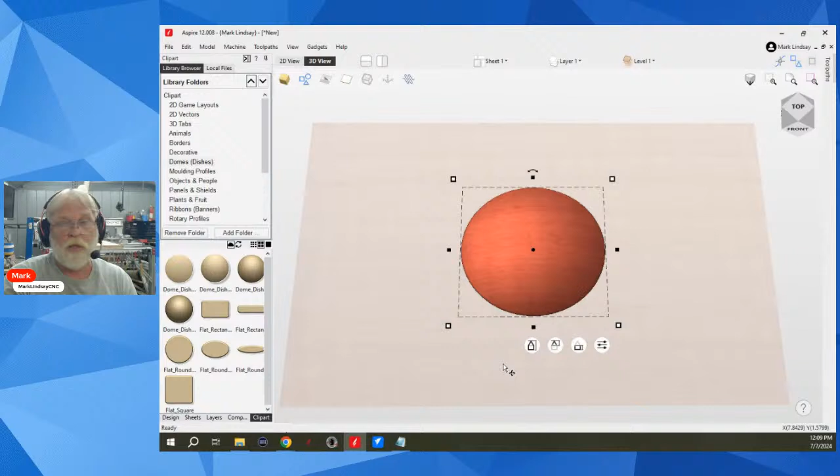So when we put components into our component tree, let's say we go over here to clip art and I jump in here and I grab easily the most common, a dome and dish. I'm going to go for a fairly shallow dome slash dish, and we'll just click and drag one over here to the center of our material. Now we have a component, and you can see it takes on that appearance. This is the modeling plane, and we've added our first component to that plane. This modeling plane is that foundation that we're going to start building up on, or subtracting from in the case of a dish.

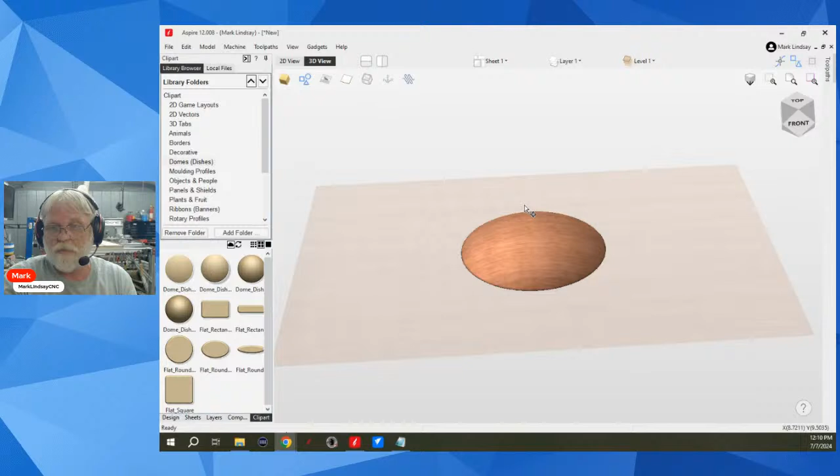Question: the modeling plane equates to the size of the material in setup. From Kurt over at Crafty Jans. Yes, the modeling plane equates to the size of the material. The software at this point doesn't know how big of a model we're going to create. So it's going to assume you're going to use the entire piece of material. Well, when you get your model completed, when you get it finished, it now knows where the modeling plane is. It now knows where your models are, but it doesn't quite yet know what you want to carve. We'll get into that later on. But as it sits, yes, the modeling plane is equal to the size of the material that you have.

Now, Ellen says, my view of how I'm sitting, the dome looks like a big hole from here. Yes, and that can be an optical illusion, but you can see that it is a dome.

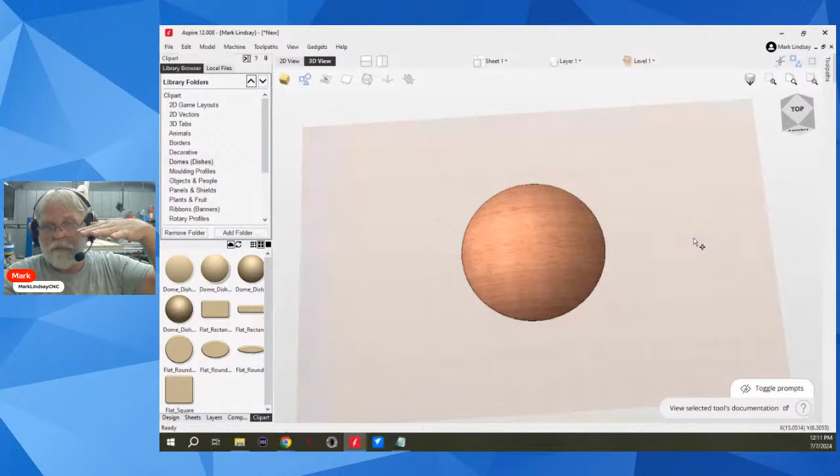Any models that we put out here now are going to be added to the top of that modeling plane. Because again, it's like the tabletop that you're building your building block pyramid on top of. That's all it is. That's all a modeling plane is: it's a surface to build up from. It doesn't have any thickness. It doesn't have any height. It's just something there to allow you to visualize what the model is going to look like after it's completed. And it's a reference for the software to know where these models are starting from.

Now, remember that the software creates the model. It models from the bottom up. So just like when you're stacking blocks one on top of the other, it's going to take that bottom block and anything you add after that is going to go on top. You can't put it off to the side. It's going to go up.

Now you can put something else off to the side of your modeling plane, but it's going to be within that first level. Let's put this out here too. I'll double click to put one in the center of my material, and now we're going to put it over here. So I have two objects on the modeling plane beside each other, but they're still sitting on that basic tabletop.

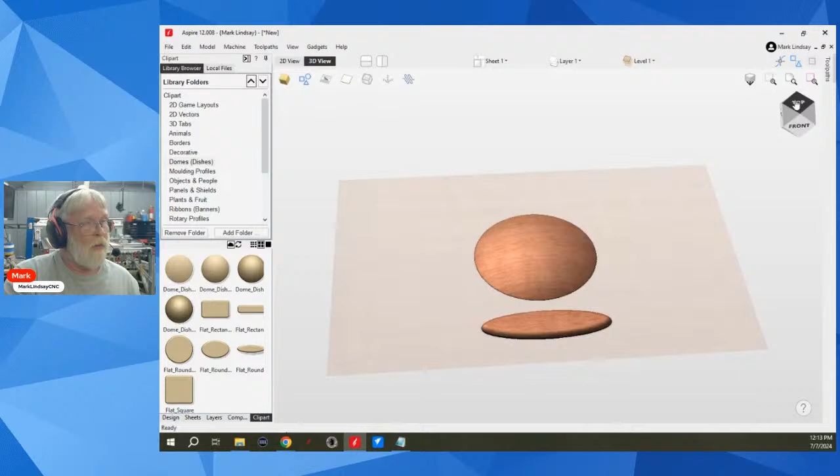So we'll go back up to a straight top view here and look at our components. We now have two components. This was the first one added, and this was the second one added. It starts from the bottom up. Now these two don't interact with one another, so that's fine.

But now let's get into the first discussion of the zero plane. And that is, when do you use one? No, let's back up from that. Let's back up to what a zero plane actually is.

Back over here in the design tab, I'm going to jump over to my 2D view. So I've got my two components placed out here. Everything is fine. What a zero plane is, it is an additional 3D component that has no height and no thickness. So in that regard, it is similar to the modeling plane, but that's where that similarity ends - it's another plane that has no height and no thickness to it.

The other main difference between a zero plane and a modeling plane is you can add height and thickness to a zero plane.

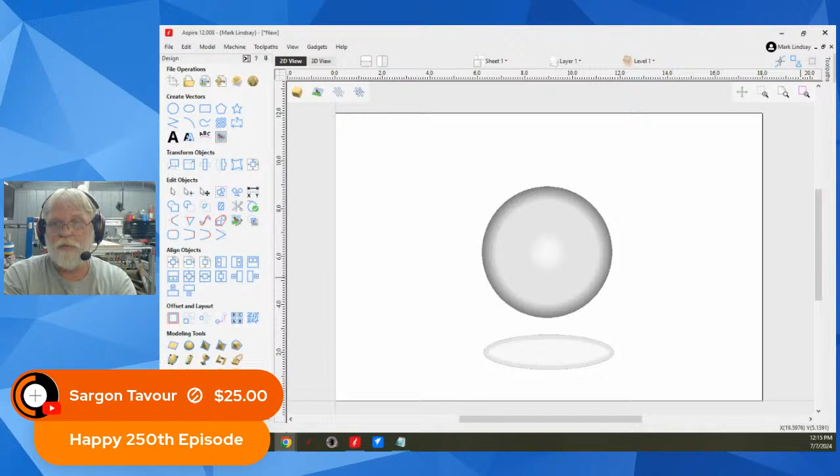A zero plane can also be manipulated in that you can tilt a zero plane or fade a zero plane, which you cannot do with the modeling plane. Again, the modeling plane is the flat surface that you're building up your components on.

So for a zero plane over here in Aspire, you have to hold down Shift and click this first icon, which is creating a flat shape component. Hold down Shift and it'll create a zero plane.

Now, why would you want a zero plane? Why are zero planes used? How are zero planes used? When we're talking about the context of a design software, zero planes are most commonly used, but not always, when whatever you're carving is placed into a dish.

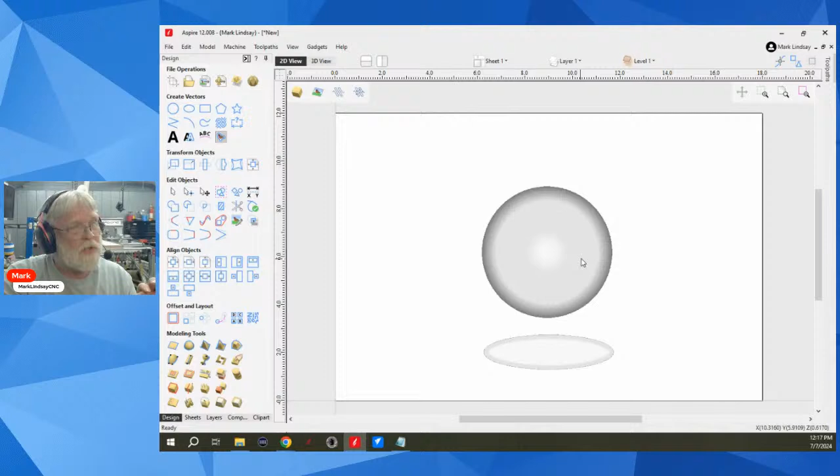The reason for that is, if we come back over here to my 3D view, I'm going to select this component here, my dome. I'm going to go into the component tree, make sure I have that dish highlighted, right click and go into the properties. Now we can see here in the properties, we have a shape height, base height of 0, and we have a combine mode. The combine mode for this dome right now is set to merge, meaning that anything beneath it, it's going to merge with that component.

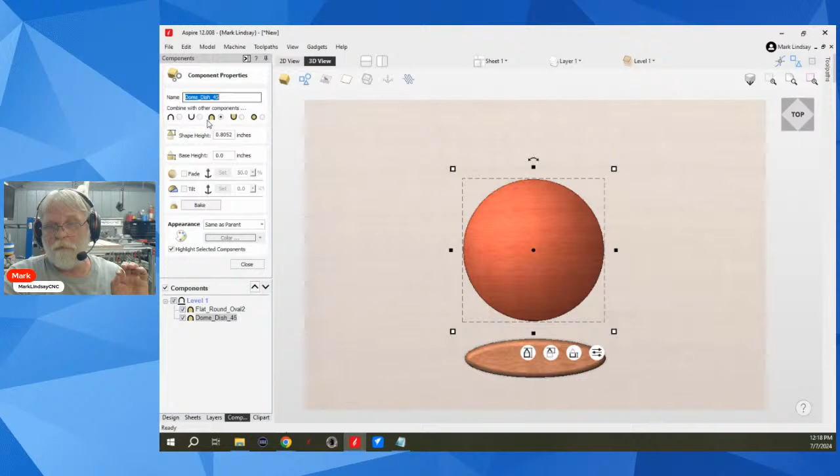Well, there are no components beneath it. But if you look at this, it looks like an upside down letter U. We're going to change that to subtract. And now what it's done is it's formed a dish instead of a dome.

We still have the combine mode set to subtract here, but now this is a dish. Now, where does the zero plane come into this? And why would you use it on a dish?

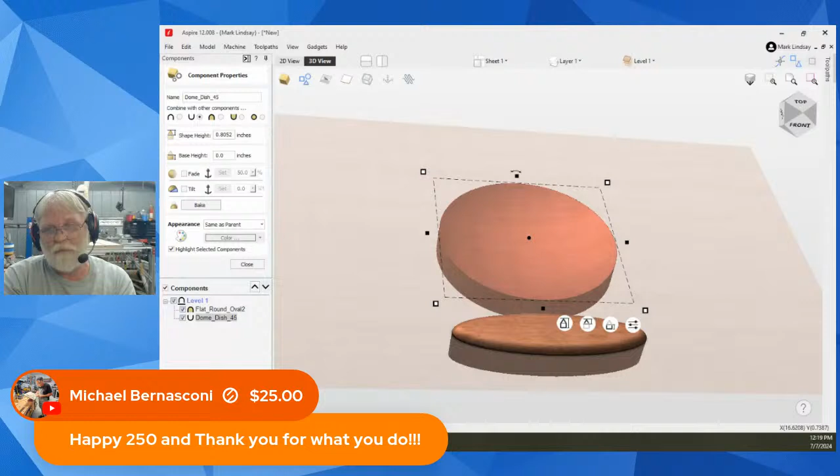Let's see. Why would you use it in making a dish? Well, because if we look over here at our dish, we can see this ragged edge right here. And that's caused by the pixels used in the bitmap that creates this dish.

Now let me show you what I'm talking about. We come over here to the 2D view, and we see that this is basically a depth map, a grayscale bitmap image. Let me rephrase that - although it is in grayscale, it's not truly a grayscale image.

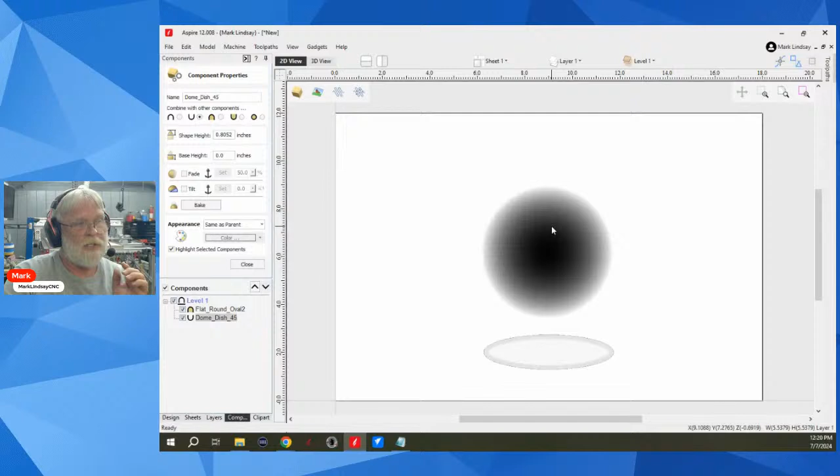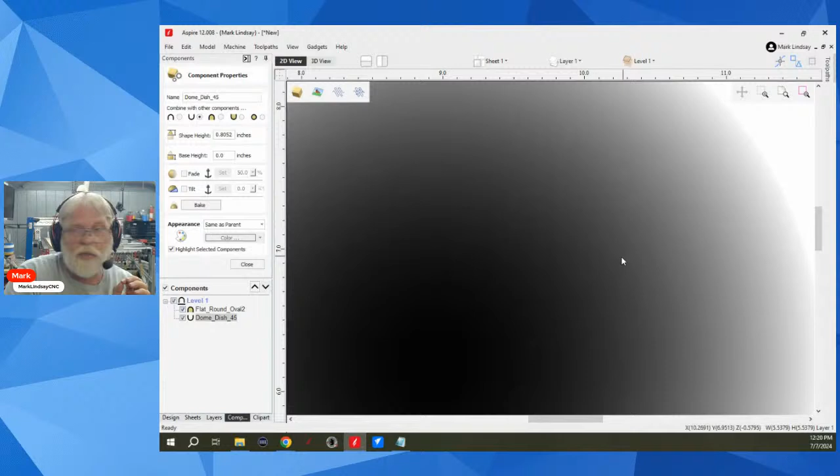In other words, what I'm getting at is, while you can take a grayscale image and import it into Aspire and make a 3D component from that grayscale image, it's not the same as a depth map. The depth map, you'll notice these shades of gray, and for those of you keeping score, there are 256 of them. These shades of gray, you can't really see a gradient. You can't see a dividing line between this lighter color and this darker color, or this darker color and this one, like you would if you created a gradient in an imaging program.

But if you look out here at the edge, you can start to see the pixels that make up this bitmap image. It's these pixels where it goes from this very light gray to bright white that form these jagged edges. And that's as close as I can get to it. It's those pixels that create that jagged edge, okay?

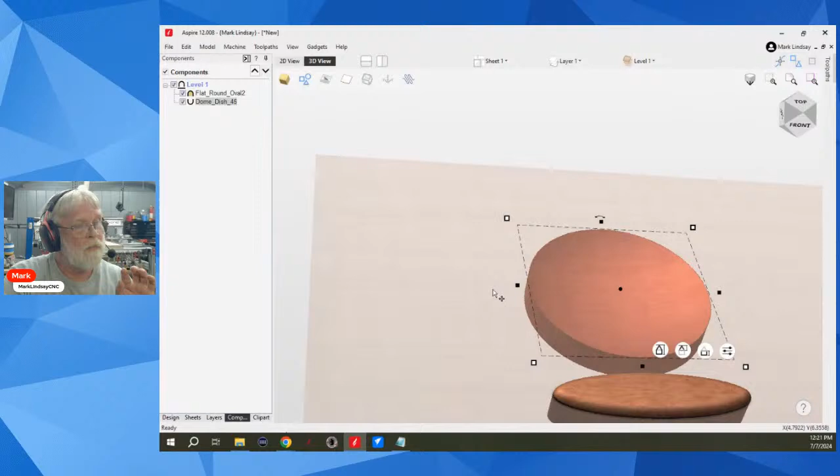So where a zero plane comes into play, remember, a zero plane is a 3D component that has no height or no thickness. A zero plane is added, let me close this, to cap off the top surface of our 3D model. Remember, all of our components gathered together in total make up the 3D model.

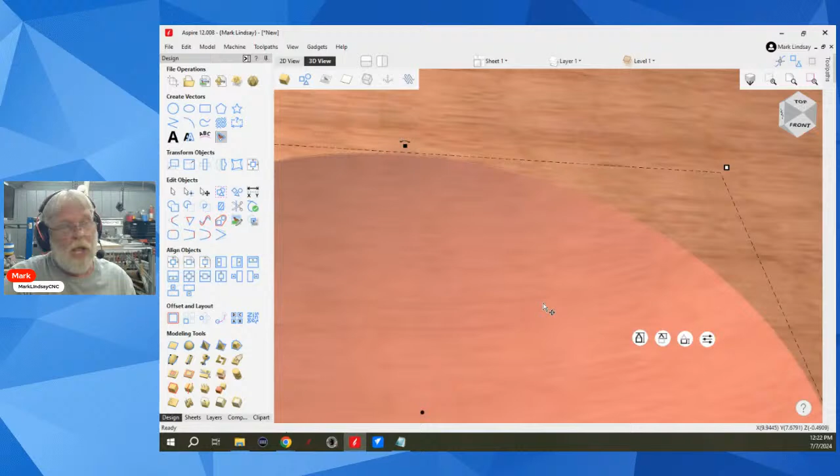So adding a zero plane to the top of it, let me get one created here, hold down shift and click on that button, and we've now added a zero plane. We've added a 3D component with no height, with no thickness, and it's set to combine with this component. And when it combines this component and this component, you can see how that zero plane fills in those jagged edges. It's simply the way it combines with this dish to fill in these jagged edges so that the bit doesn't attempt to carve those jagged edges.

This is the main purpose of a zero plane. It's not the only purpose, but this is the most common use you're ever going to find of a zero plane. Now, I mentioned earlier that you can modify a zero plane. You can, if I come over here to my component tree, there's my zero plane right there.

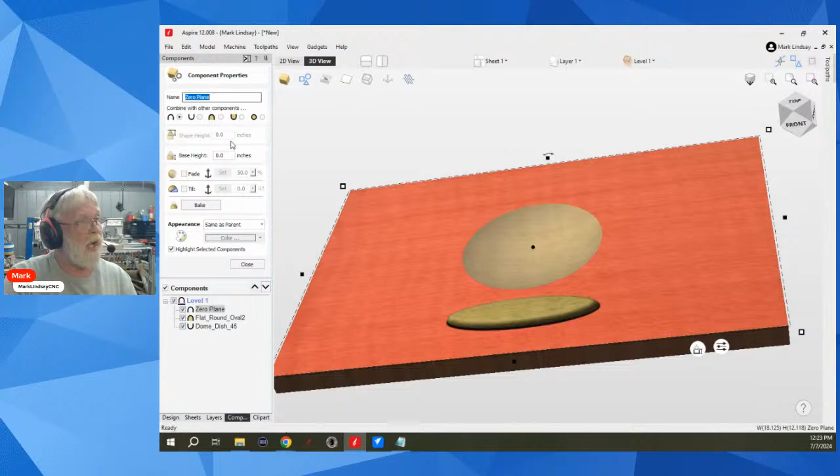I can select it, right click, come down to properties, and I can give that zero plane a base height. I can't give it a shape height because the shape height is 0. But I can give it a base height, which will add thickness below the zero plane. So if I give a base height of, let's go with a quarter inch.

And it updates, I have now moved that zero plane up, but now my dish has disappeared. It has filled in that dish. So I can't do that because it's going to fill in that dish.

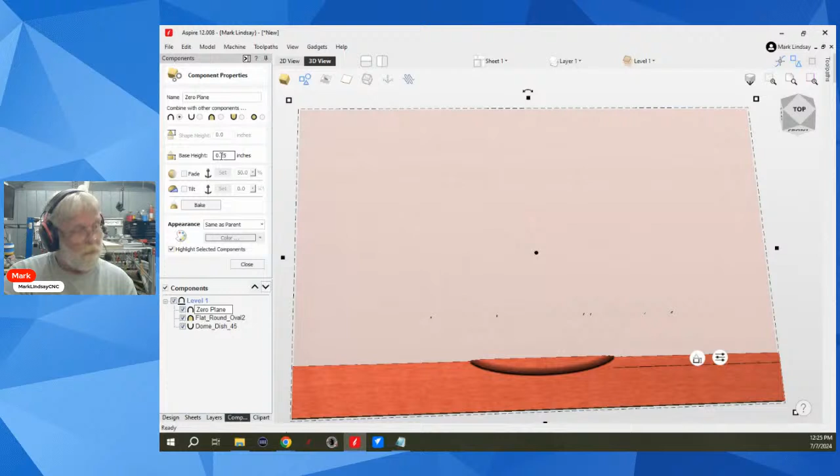But I can come here and give it a negative height, a negative base height. But again, come on, it's taking a while for the software to catch up. Come on, yep, there we go. Come on, let's go with negative. This poor computer, it's trying to, there we go.

By dropping that zero plane down, it's going to cut into the dish. There we go, making our dish shallower than it needs to be, than we want it to be.

So we can adjust it, it will come in handy on occasion, but I'm going to take it back to 0 the way it's supposed to be. And now it's not interfering with our components. Click off, close my properties.

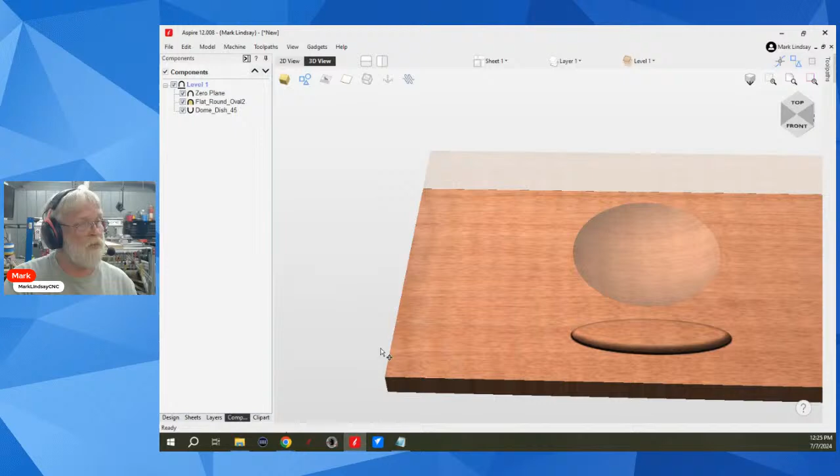So a zero plane is most commonly used, and its main purpose is to act as another component that will interact with everything beneath it and fill in any missing pixels caused by the pixelization of our dish.

Now, I'm mentioning dishes quite often, but without getting too technical, again, that's the main use of a zero plane. Now, there are other uses for a zero plane, but those come with more advanced 3D modeling that is way above my head. Michael Mazalik would be the better source for that.

A.L. Peleg says, so it makes the height of everything above it to be 0. No, it doesn't change the height of any component above it.

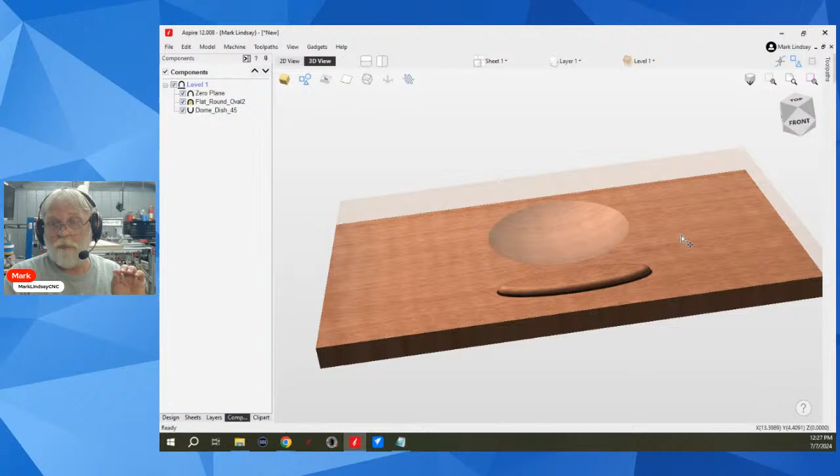Let's go back over here to the 3D view, and you can see that because I have my zero plane right here, this oval is still projecting above that zero plane. See that?

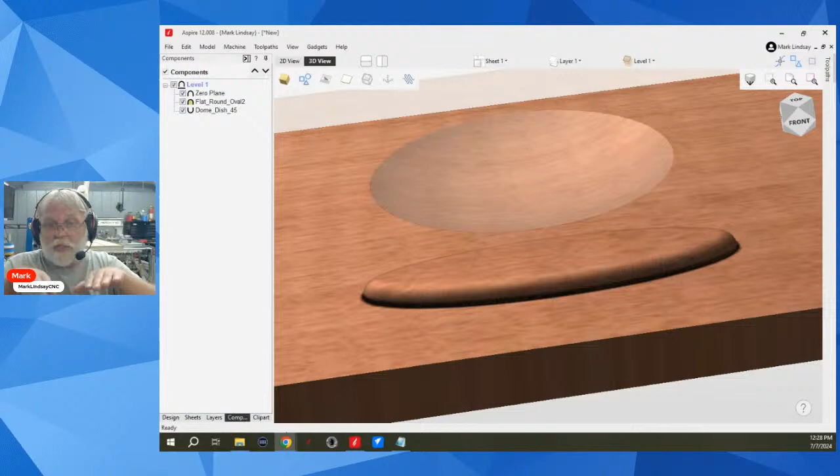If you would take any other model and place a zero plane into it, it will cut above it, yes it will. The zero plane is acting like in our tower of blocks, it's acting as another sheet between some blocks. So we can build up blocks and then lay that solid sheet over the top and then continue to build on top of it. And that solid sheet basically helps to fill in the cracks between the blocks.

So will the second component get 90-degree sides from the minus number?

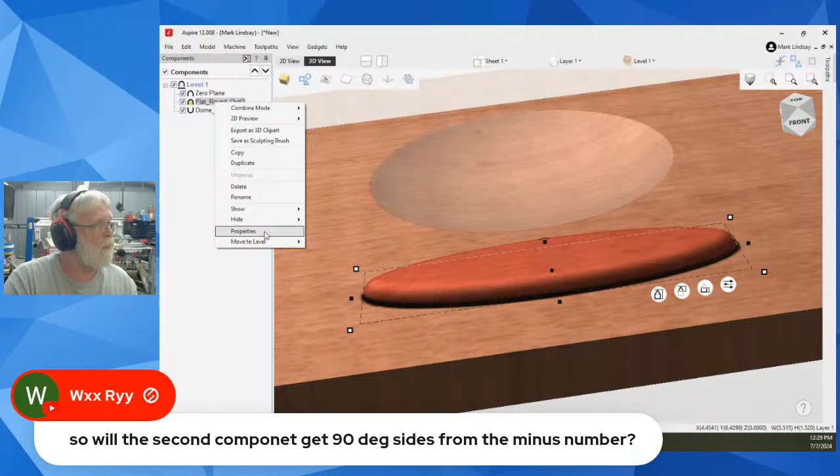This second component here is basically going to be carved down to the level of this zero plane. Depending upon how you set your tool path to carve, let's take a look at this flat round oval and see its properties. Its shape height is 1/4 inch tall. If I go to 1/2 inch tall, it's still going to be 1/2 inch above this plane.

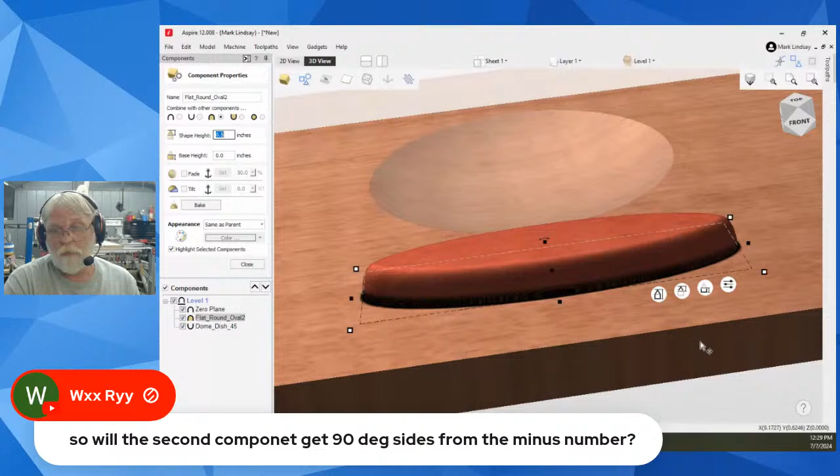Now look at my readouts down here in this corner when they appear. I'm up here at the surface, and that surface is zero. If I put this up here on top of this, it's 1/2 inch. There may be more base down below it, but it's going to count from here. As Michael Mazalik says, a zero plane equals a limiting plane. This is as deep as it's going to cut, except over here. Anything with a higher Z than this will be cut above it. Anything with a lower shape height is going to be cut into it.

So if I understand you, on multiple zero planes, you can only have one per level in the component tree.

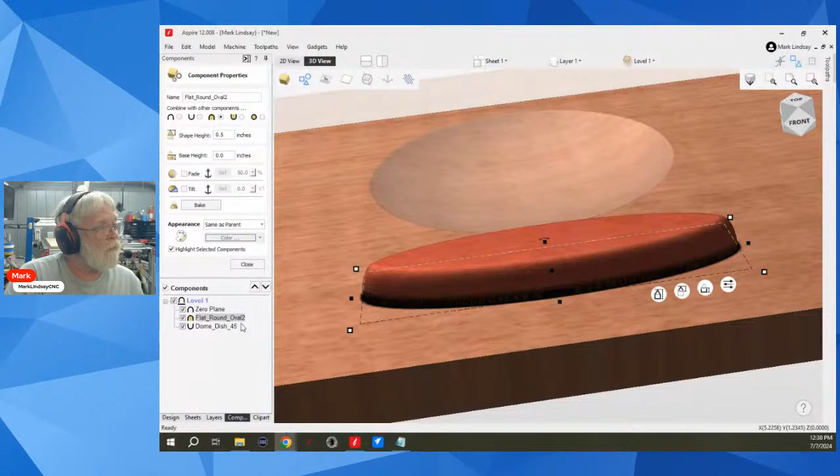I haven't tried multiple zero planes, but let's give it a shot. We'll go up here and insert a new level. In this level, come over, make sure I'm working in level 2. Let's see if I can add a zero plane in level 2. And it appears that I can add a zero plane on a separate level.

Now let me come back down to level 1 and see if I can add a second zero plane. I don't think you can, and to be honest, I'm not sure of an application where you'd need more than one zero plane on one level. But because it is confusing, you would have to rename each plane. So let's go ahead and try, and looking in my component tree, it did allow me to make more than one zero plane on that level. But you would probably want to rename these, generally speaking, for their purpose.

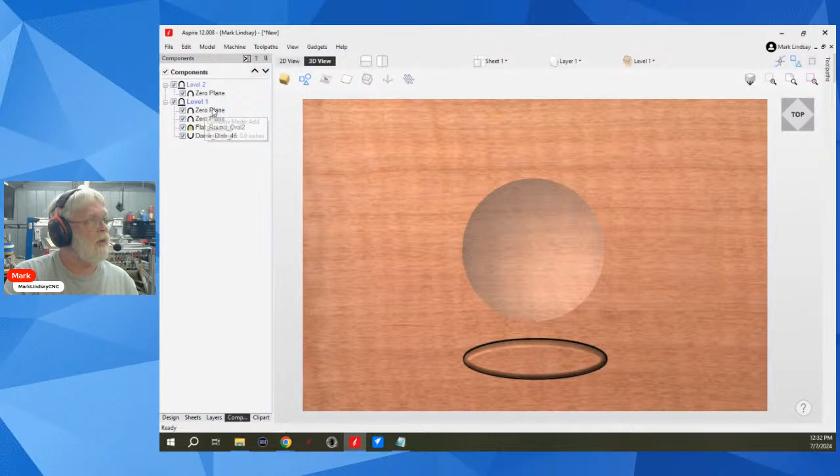So let me go ahead and get rid of this one, and I'll delete that one too, because I have no use for it for this discussion. And we'll delete the level as well. Boom. Okay, remember this is in the design context. We'll let this reload. Looking at the bottom, we're still good, nothing going through.

I'm also going to get rid of this oval simply because it's a distraction to me. There we go. This poor computer's having a hard time keeping up. Let me get back over here into my regular selection. This zero plane should come out here to the extents of my material, but all the playing with zero planes has done this.

Now we come over here to the 2D view. We've got the model for our dish, but if I come up here to layers, there is a layer for the zero plane. So the zero plane is created on its own layer, not its own level, its own layer. But by default, it's turned off to avoid confusion. Now if I turn that zero plane on, there it is. That's what happened, I moved the zero plane.

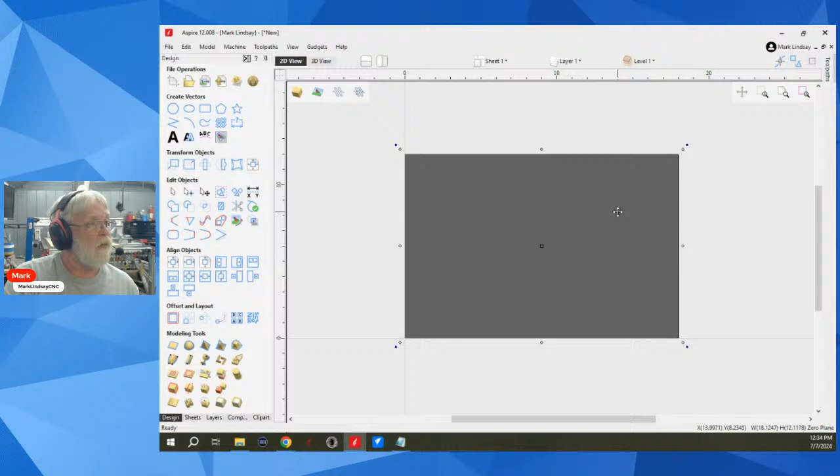So let's move that back up there so that it's covering the middle of the material. But you see what can happen is you can turn that zero plane on and change its shape, or change its size rather. But now you have this zero plane there and it becomes a distraction. So by default, the zero plane is turned off so that you can still see it, but do know that it makes its own layer.

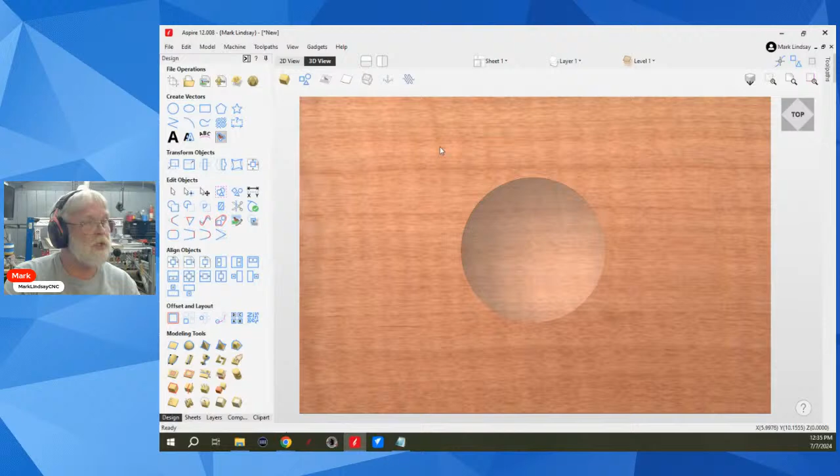Now once again, in the 3D view, we have it covering the whole sheet of material. This seems pretty simple, but it creates a bit of confusion. The main purpose of a zero plane is to fill in any rough edges on a dish. That's the main use. You can add a zero plane without using a dish, and in that case, as Michael pointed out, it's a limit plane. It's going to limit the depth of the carve to this surface right here, meaning the bit won't carve any deeper than this.

Let me go back over here, and I think what I'll do is start a new sheet. Yes, I'll do that. I'll add a new sheet with exactly the same settings, I'm not going to change anything. I'm going to call it sheet 2, and change over to sheet 2. All right, and I'm going to get into something else here. There's another context for a zero plane, and that is when you're importing a 3D model.

Russell says it's limit planes he can't figure out. Carving a 3D two-sided model, you need limit planes for both sides, but not always at the same level. Yes, that's when limit planes can be used.

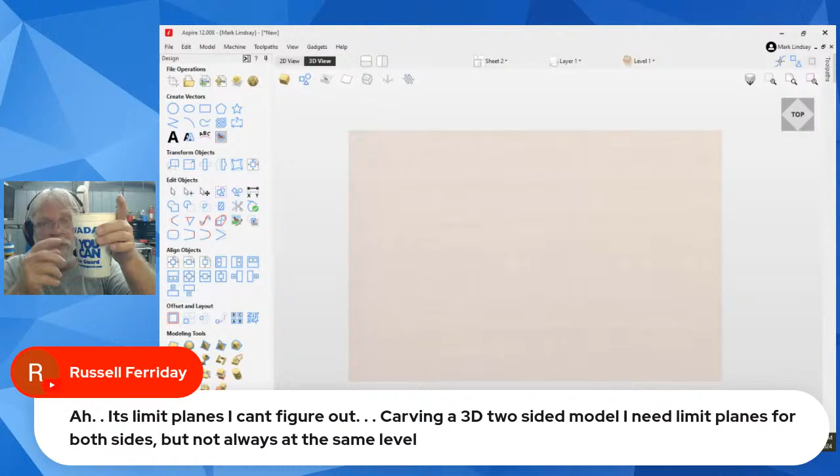For instance, if you have a model you're cutting about halfway through the material on the top, then when you flip it over, you want to cut just beyond the halfway point for the other side. You can set a limit plane and bring it down below halfway, so when it cuts through the object it'll cut about halfway. Then when you flip it over, it would cut beyond that halfway point so you don't have that line around your object that you'd have to sand off.

So yes, that's a perfect example. Now let me get back over here to sheet 1 because there was another question.

Ellen asks, do you have to bake everything? LOL, a make and bake. Yes, I will show when to use the zero plane, and in fact I already am. If you're creating a dish, use a zero plane - you will have a much better result with that.

Now if we come over here to the component tree and go into, let's say, the zero plane, we go into properties, there's an option to bake. Now what baking does - let me close this. This may or may not be a good example.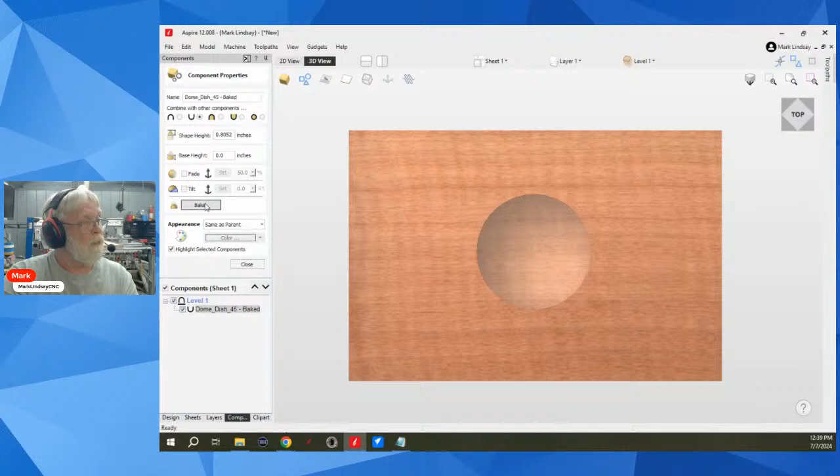Now when we come over here and close this, we come over to our component tree - we have a dome dish baked. We can look at it. Uh-oh, what happened? It's no longer a dish, it's now a dome. Can I control Z that? Yes, I can control Z that.

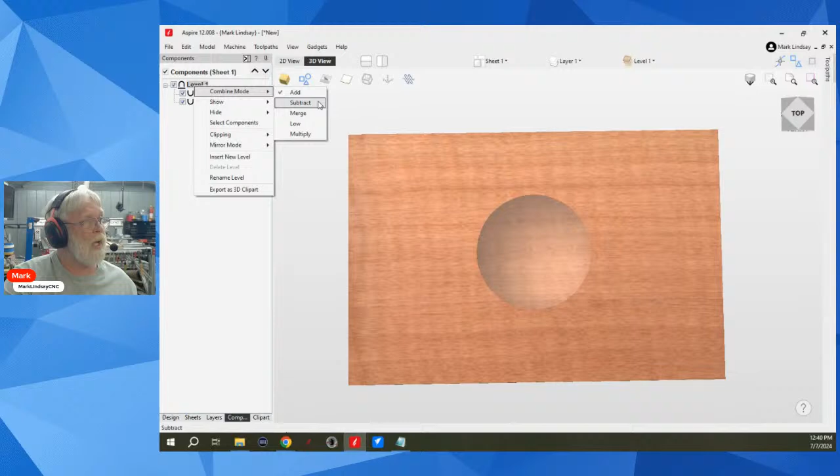What we have is we've got varying different combine modes. Let's take the combine mode and change that to subtract - what does that do? Nothing outwardly. Let's select the level, let's check the combine mode, and let's make that subtract. There's your problem - take that back to add. There we go.

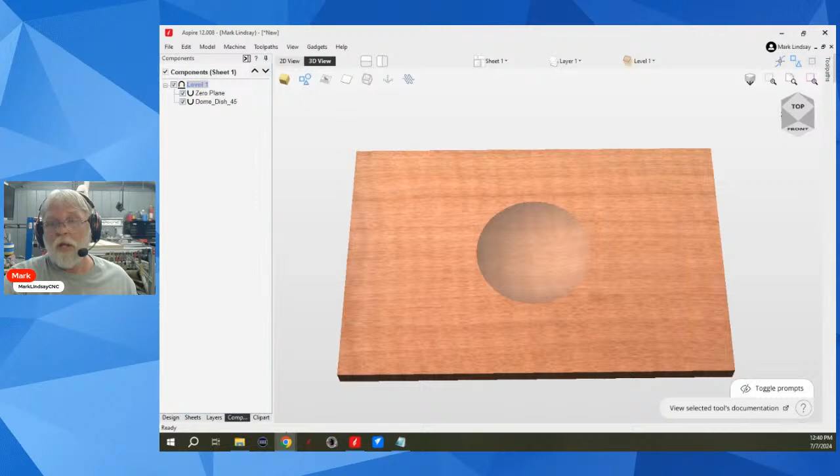Jim Brown says, so if you have 3 layers of 3 different woods, how would you use the zero plane? I wouldn't. You can - I guess you could set them. I see where you're going with this. I would have to explore it a little bit, Jim.

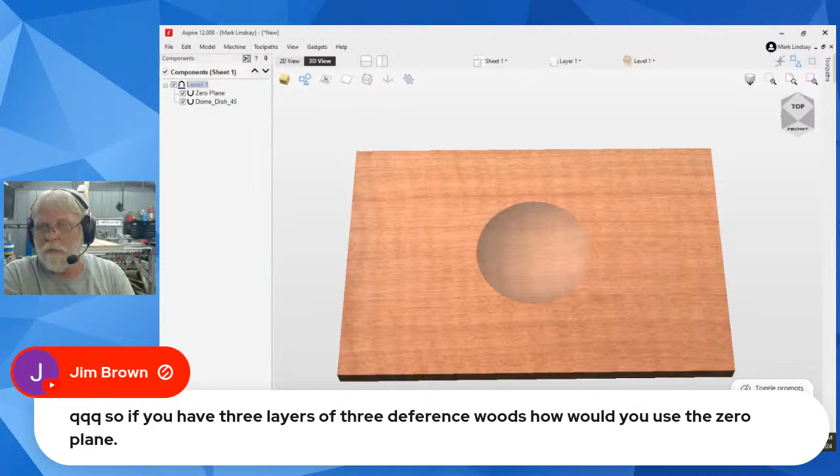You can use them to represent where, if you're gluing, say maple, then cherry, then maple again, and you want to carve something in that maple but not all the way through the cherry, you could set zero planes to limit you to this part of the model, cut down the thickness of your maple, then a zero plane here for the next part. But I would have to explore that - I've not explored that at all. Try it yourself, and when you create those zero planes, name one maple, then cherry, then walnut, or maple 2, whatever. Let me explore that because that's pretty cool - that's actually a pretty cool idea.

By baking these two, now that I have the combine modes set correctly, I can go into properties and bake them, and they should come out correct. Nope, it still wants to become positive instead of a negative. So you see, Ellen, you don't want to bake. Control Z to undo that - bring me back to my point here.

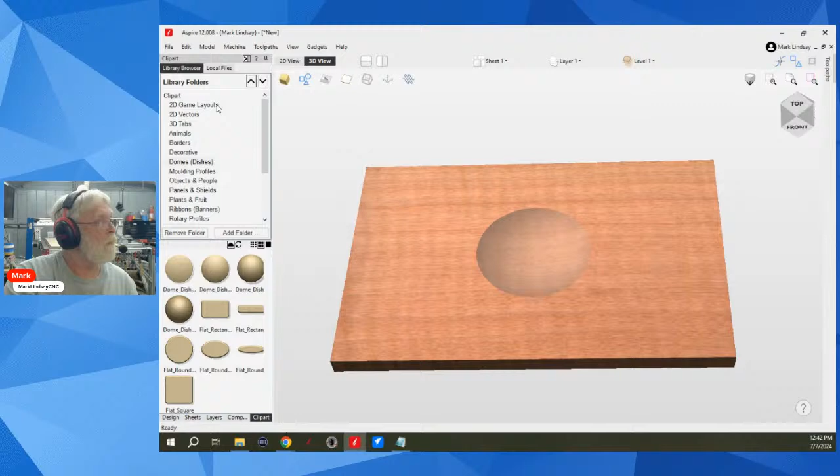Now where baking comes into effect is if you have, let's say, let's get into some clip art here, and we're going to take our representative mascot, Wally Gator, and put him down in the bottom of this dish. Hold down Shift and let's reduce his size. There's Wally. Okay, all right, now we've got the gator down in the bottom of the dish.

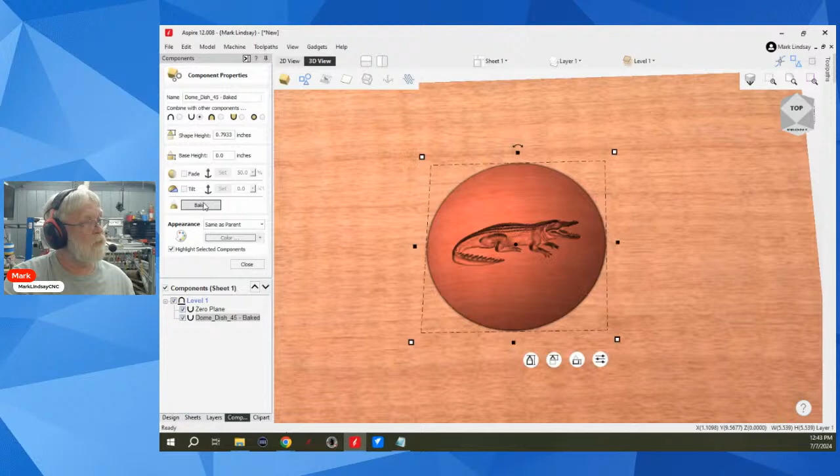Let me go into my component tree. I would probably want to move my alligator down below the zero plane. But if I take these two and bake them, and now - come on, ah, it flipped the opposite direction. What am I doing wrong, Michael? I'm doing something wrong here.

That is set to subtract - why would I do that? For some reason now changing the combine mode to the baked one. Okay, I get it, all right. Changing that combine mode, now you notice I no longer have the alligator and the dish.

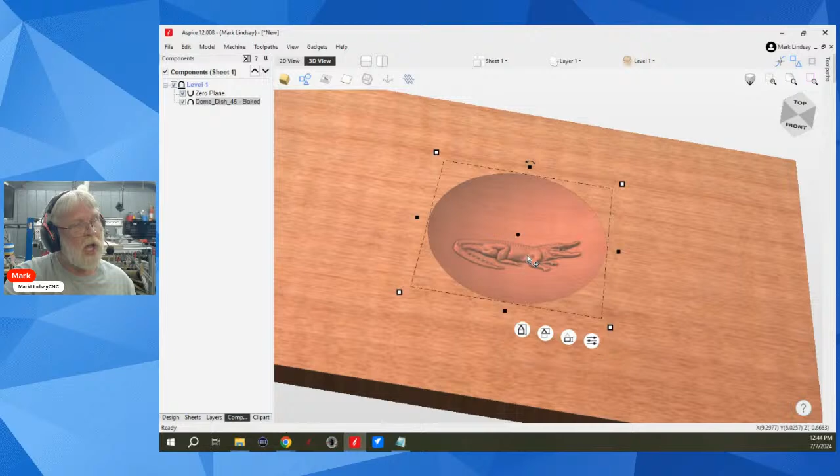And now they are one piece. I can no longer change the size of the gator, and I would have to Control Z to unbake them, or start over. You don't have to bake. You can, and in fact, Michael Mazalik taught me this quite a bit.

Either baking or, let me Control Z that to undo it so that I have my alligator and my dish back. All right, there's my alligator and my dish.

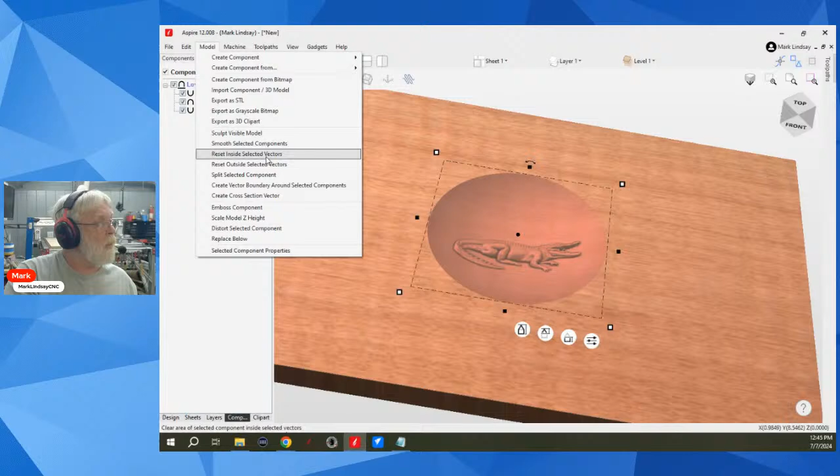What he has taught me is select these two, then it's up here under Model, I believe it's Create Component from Visible Model. To create a component from these two. It doesn't replace these two.

What it does is it creates a component. I need to hide the zero plane. There you go, shut off the zero plane. Now with those two selected, Model, Create Component from, or I can bake these components, or I can create components from visible model.

And now it adds another model. It doesn't replace these two, and in fact I need to turn them off. So now I have one piece. This is all one piece, it's no longer two, and that's this up here.

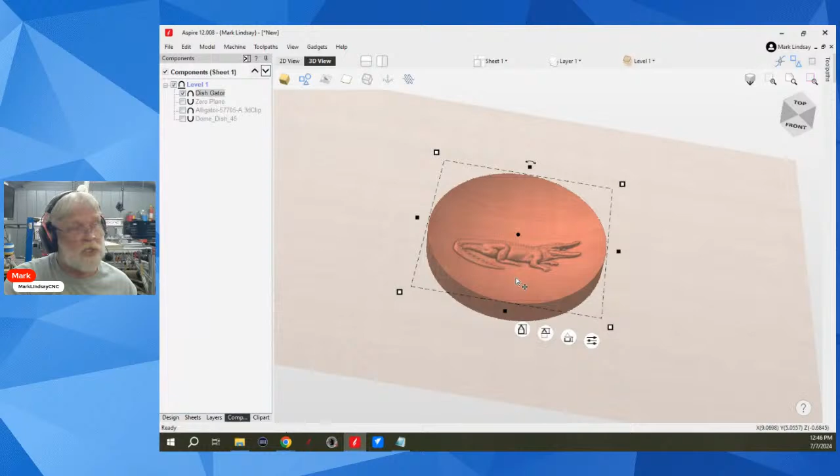So I could rename it, call it dish gator. But if I find a problem, if I need to change something, I can turn this off, turn these two back on, make my changes, then come back and make a new dish gator. So you can bake the model, but you don't have to, it's not a necessary step.

Okay, so let me go ahead and get rid of dish gator and turn my zero plane back on. I think I have to turn on dish gator. Yes I do, grab it and delete it. Shaboom, okay. So, all right, let me get back up here. I'm missing some questions, I'm sorry.

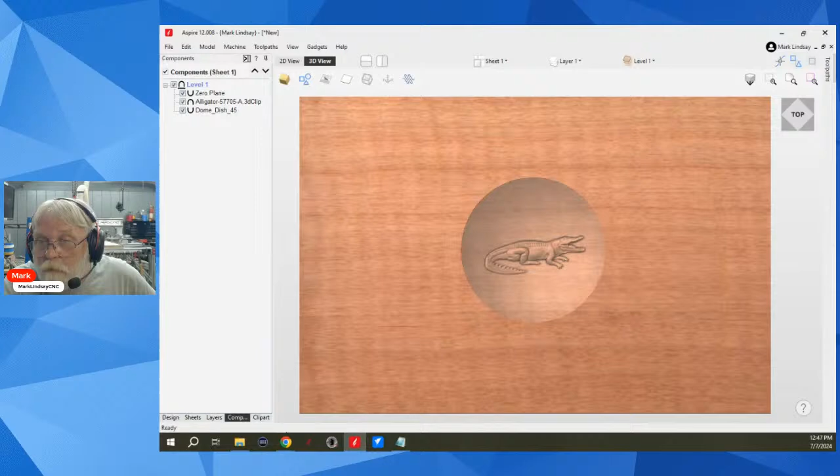Yes, that's what Michael just explained to me here. Could it have been, after baking, your baked stuff are negative, and the fact that the combine mode is subtract is what makes it to be a dome again? Yes, minus negative, yes, which sounds counterintuitive. A negative plus a negative does not necessarily equal a positive, but that's in essence what happened.

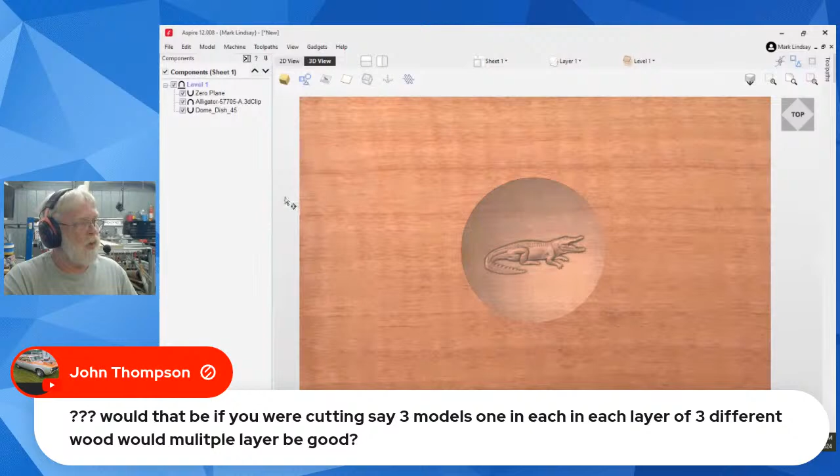John Thompson wants to know, would that be if you were cutting, say, 3 models, one in each layer of 3 different woods? Would the multiple layers be good? I think you mean multiple zero planes. So if I wanted this to, cutting this to start at the material surface...

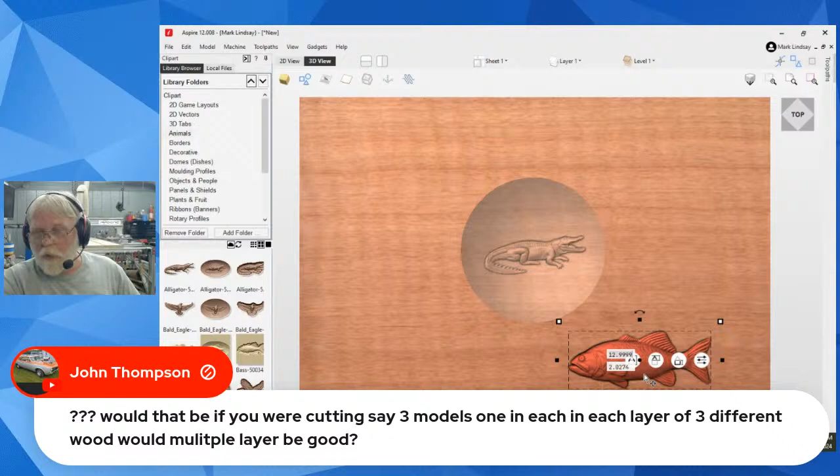Let's go back over here to clip art. I don't know, I'm just picking things out of thin air here. I wanted this cut way down deeper. Yes, I could create another zero plane here and drop that zero plane way down so that this fish, instead of being added to the top of this model, it was added, say, down here somewhere.

So yes, I could do that, John. Now let me Control Z because I don't want that fish there, and I don't want it there either. Shaboom. Oops, Control Y. Yep, I'm going to have to just go into the component tree and get rid of the fish. Delete, thank you.

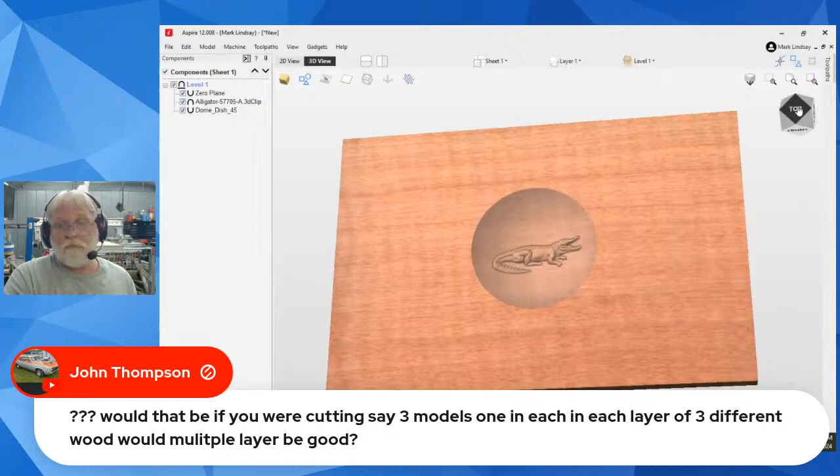All right, let's see here. CAD CAM Wizard asks, so the zero plane was limiting the embossment, so it was forced to go up, even though it was set to subtract? Yes, yes.

Brooks Martin asks, can you clip the zero plane to a vector? I believe you can. So let's go give that a shot. For instance, let's go into the 2D view. I want a circle. Whoops.

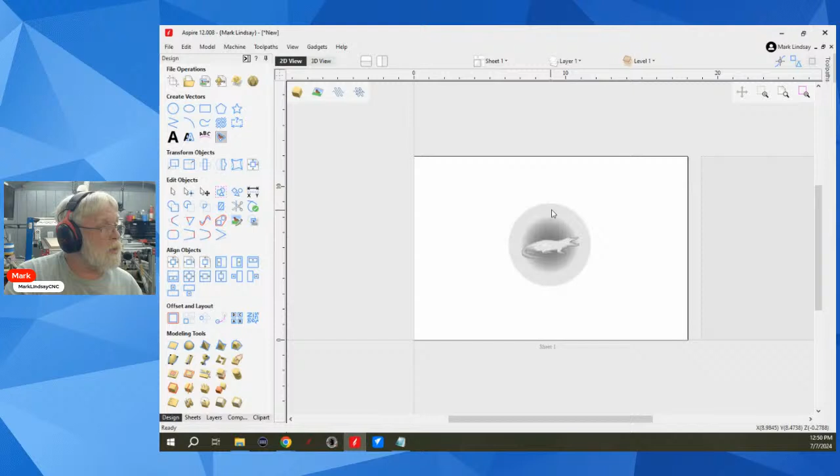Let's do this the right way, Mark. Close, delete. What is the size of my dish? The size of my dish is 5.53, let's make that 5.5. Okay, so I'm going to create a circle, 5.5 inches, and I'll come out here to the center of my material, click.

Didn't quite get to the center. I don't think I centered any of this up. In fact, I'm almost sure I didn't. Nope, I didn't. All right, well, here's what we're going to do. Thank you, Justin Wilson.

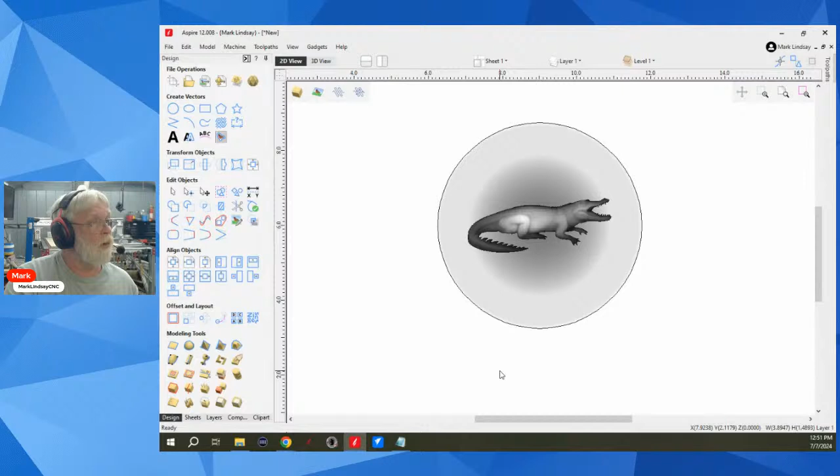And now we'll move that to the center, go into my component, select my alligator, and we'll put that in the center. All right, so now we're good. Come over here to the 3D view, and now I have a vector here. I've got my zero plane.

In Aspire, you do this one way, well, one of two ways. Or in VCarve, there's one way to do it, and that is to use level clipping. In Aspire, I can select that vector and then come down here to clear the area of the selected component outside of that vector.

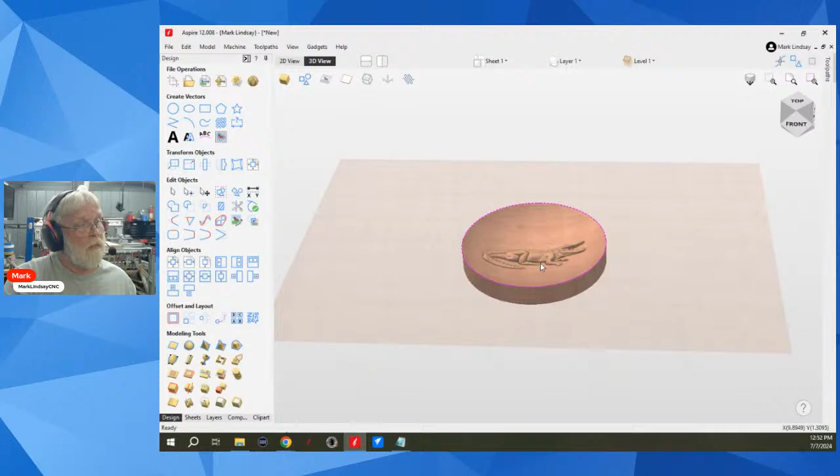Select the 0 plane, hold down Shift, select the vector, and let's try that again. And the 0 plane is gone. But it's outside of the edge. Let me click off of that vector. It's outside of the edge, so it should fill in. Maybe I need a little bit larger. I think I need a little bit larger because it trimmed away the whole thing.

Okay, Control Z. And let's make the size of this vector 6.5. Delete 6. Apply. Okay, close.

Back up to the top here. We'll select our 0 plane, hold down Shift, select the vector, and clear the component outside of that vector. Now my 0 plane is gone out here, but still here filling in my edges.

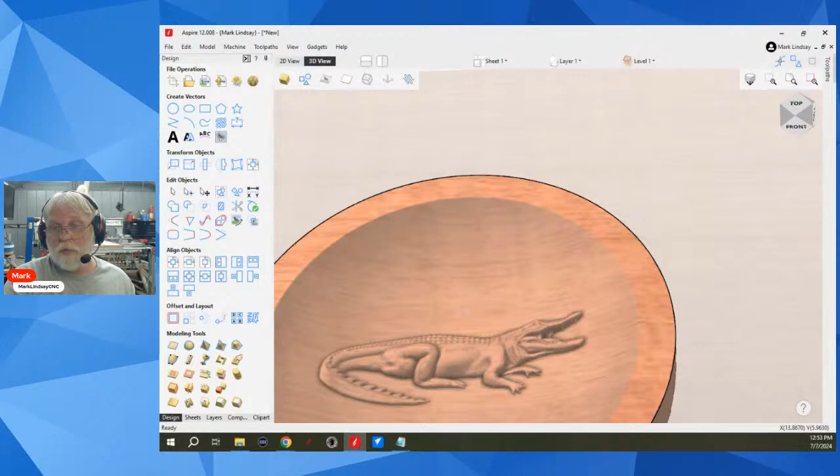Let's see here. I clearly remember we already had a live stream about this. I think it would be wise to first focus on all the combined modes and only then look at what the 0 plane does when added to the model, and not focus primarily on the dish edge use case. We've already done a couple of live streams on the combined modes, and I have edited videos about the combined modes. This is addressing specific questions about the 0 plane.

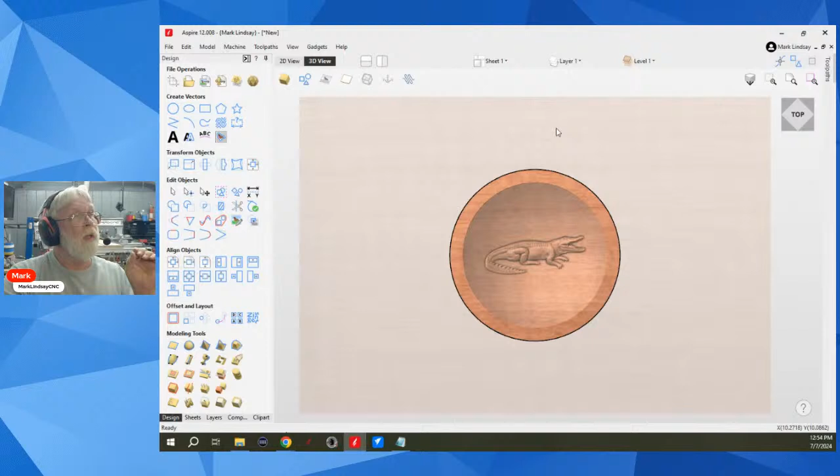And I'm about to get into the other use, which has caused a lot of confusion, and one that I had direct questions about. And that is getting into sheet 2 over here, importing a 3D model.

Now, this is the same in VCarve and Aspire. If we come over here to import a 3D model, import a 3D model, and I'm going to go in here and find, there's my 3D files folder. I'm going to use this mantle clock face and open that. And that brings us into the import window.

Let's get it sized and positioned first. The first thing I see is this is in inches, so we're good there. And I'm going to center the model. Right off the bat, the model is bigger than my material, so that's a mistake on my part. I need to fix that.

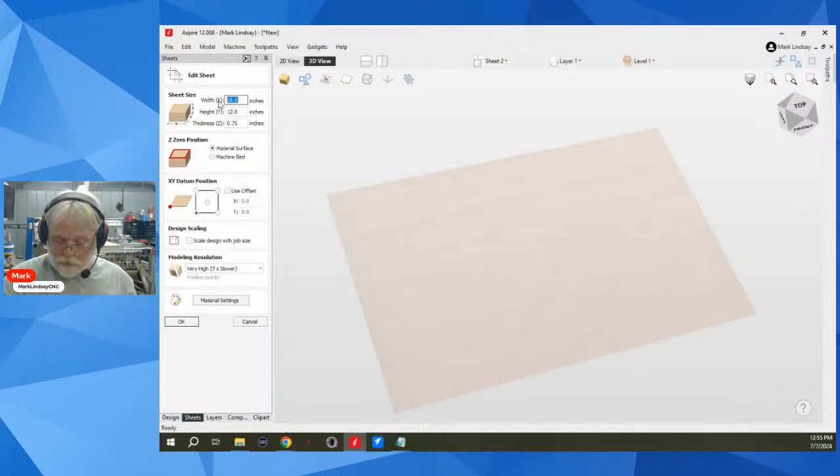In fact, let me cancel this. I'm going to go in and change this sheet 2, select it. I'm going to edit it, and I'm going to make that sheet 25 inches long, 25.0. Very high. Okay. Now I'll go back and import.

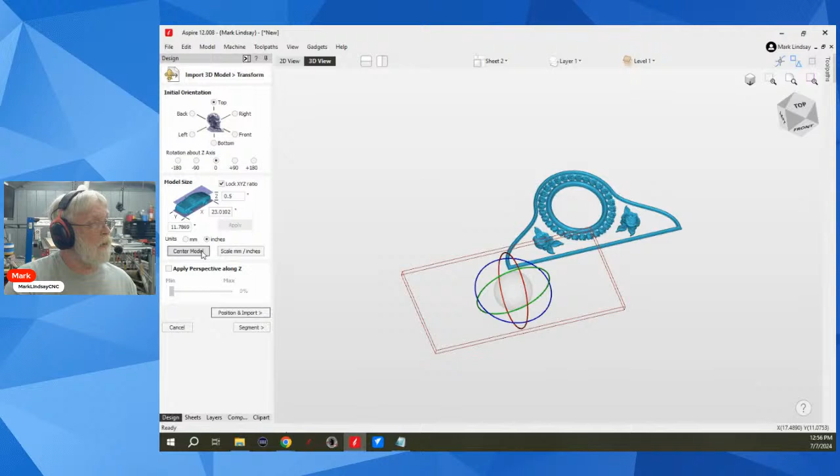So we'll import a 3D model. And again, I'm going to select the mantle clock face. And again, I'm going to center the model. So the model is centered on my material.

I'm within the XY bounds of my material. If these numbers were crazy high, that tells me it was drawn in metric. If it's 250 units wide here in X, it was drawn in metric. So you would scale millimeter to inches, and that would reduce it down to the size in inches. By the same token, if you were to import something and it's ridiculously small, 10 millimeters wide in X, it was drawn in imperial, you would select millimeters for your units and then scale millimeters to inches, and that would scale it up to the right size.

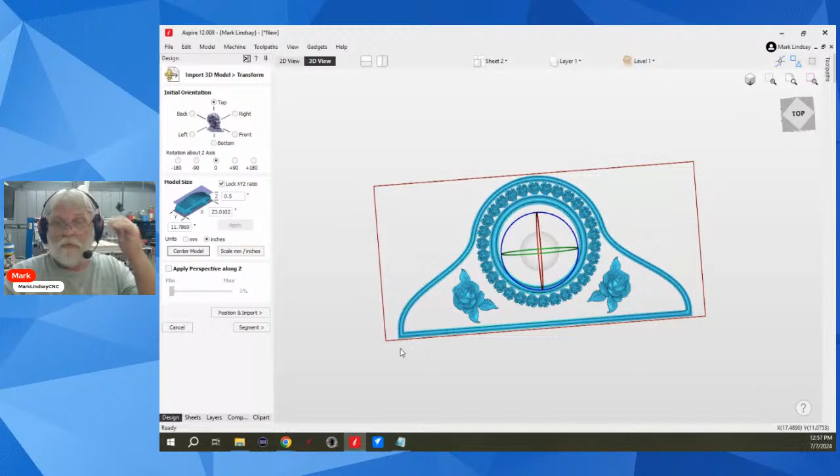So I've got my position. I'm looking at the top. I've got the size correct. I've centered my model so it's within the bounds of my material.

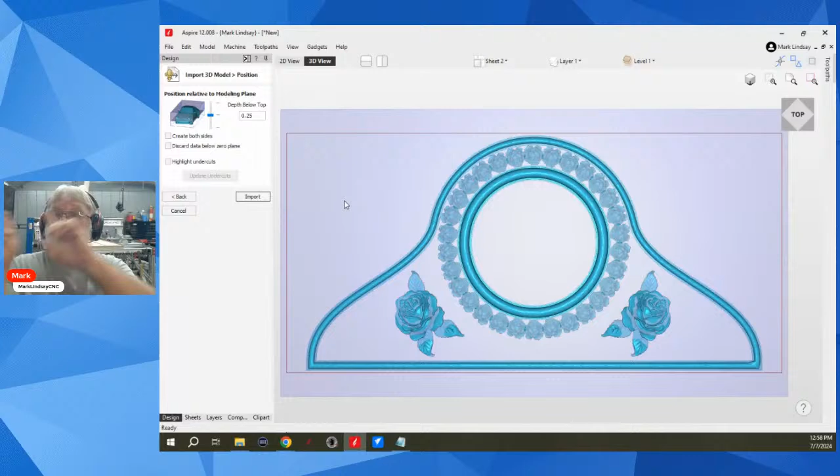Now we're going to position it and import it. I've got the initial orientation correct. I've got the sizing correct. We're good. Now we're going to position and import. And this is where people get confused because there's a zero plane in here too. But it has nothing to do with the zero plane on the design side. What this is doing is deciding where this model is placed and how much of it is being imported.

Now, we see this gray plane right here. And if we kind of turn over here to the front, we can see where that gray plane is right here. But there's a bunch more of this model. This gray plane is also called a zero plane.

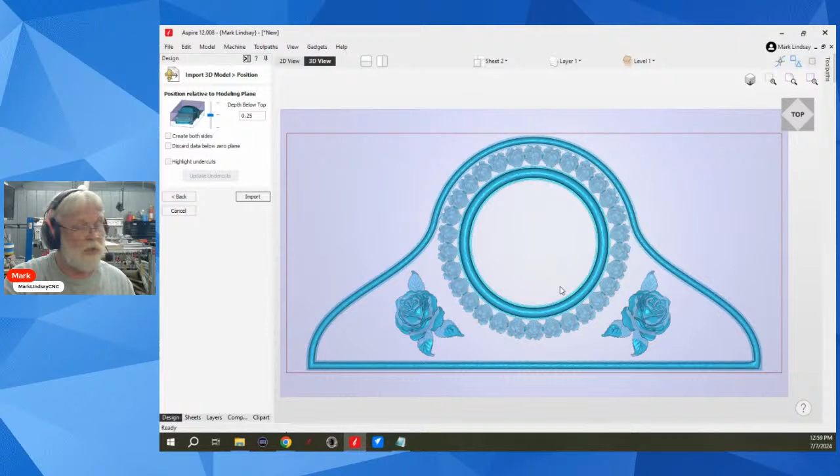That doesn't confuse anybody, right? I've been doing this for a couple of weeks and it confuses me. But it's kind of a misunderstanding of terminology more than anything else. This is not the same thing as the zero plane in the design side. This is used strictly to figure out where zero is going to be in relation to this model. It's similar to the modeling plane in that regard, but not quite. Again, the modeling plane is that tabletop where we're going to stack our blocks.

Think of this as a way of slicing those blocks in half or in quarters, or what have you. Do you want to import that whole square building block, or do you just want to import the top half? That's what this plane is doing.

It's allowing us to figure out we may not want these two steps down, we may not want these roses. We may want everything. Well, if we want everything, now we're looking at dragging that plane all the way to the bottom, and we're now importing all of the model.

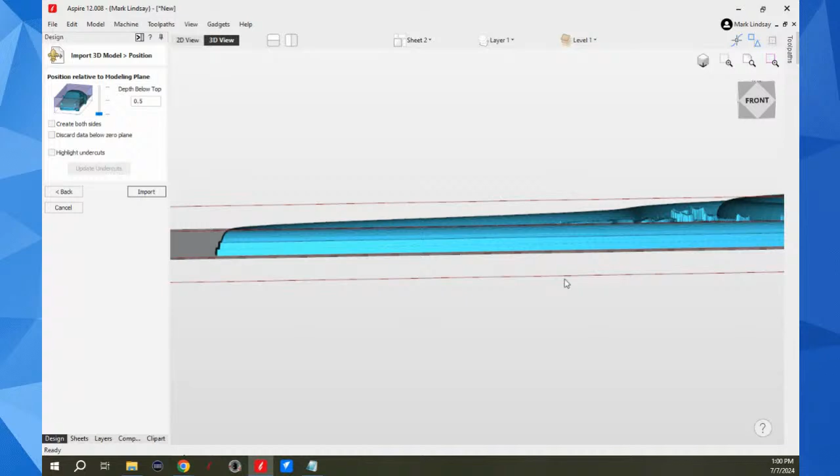Now, there is one thing that scares people, and that is you see here a representation of our material. We kind of lucked out that with this model, it's only about a half inch thick, so it's going to fit well within our material block. But what if our material is 3/4 inch thick and the model is 1 inch? When we flip it over and look at it from one of these views, it's going to stick out of our material block.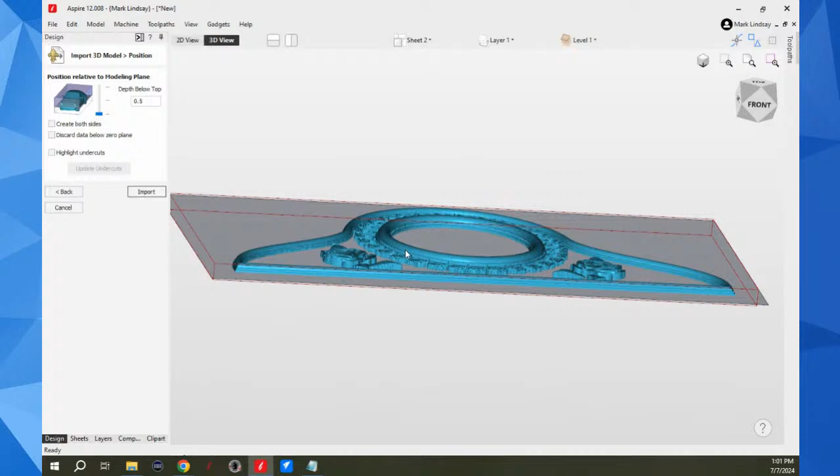And in fact, this one does stick out over the top of the material block. That can be fixed after the import. It's going to import the whole thing. That's the function of this, to figure out how much of this model is going to be imported and where the bottom of that model is. So think of this 0 plane as just positioning what areas of this model you're going to import.

If, like this one, it sticks out of the top of our material block, that's fine, it's okay, because look how high up it is in the material block. We can adjust this after it's imported. So don't freak out if it sticks up out of the top of the material block. It's okay. Let me flip over here to the top again.

Whoops, I double clicked it instead of single clicking it. So what we have here is we have depth below the top is a half inch. My slider is all the way to the bottom. That means the entire model is above this plane. It's going to import the entire model.

Let me play around here and adjust it just a little bit and show you what happens when I slide this up. You'll see that the model is retracting down into that plane, and suddenly these are grayed out and out of focus. These things are not going to be imported.

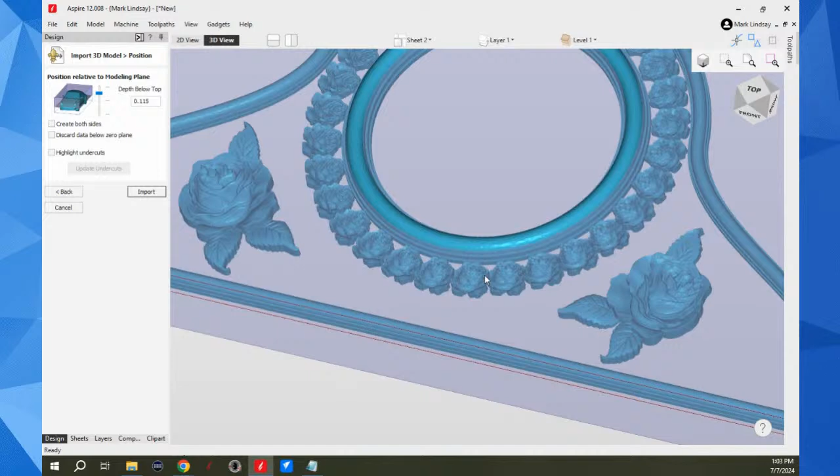We want this whole thing imported, so we need to drag this down and make sure we're good. This 0 plane here has nothing to do with the 0 plane we used in the design window. They are two separate things.

Now this up here says position it relative to the modeling plane. Yes, that is true, but again, only in the context of this import window. We're just setting how much of this model is being imported. And when you want all of it, regardless of how thick it is and how thick your material is, drag that slider all the way to the bottom.

Now we have choices of creating both sides of the model. This model doesn't have another side. It's not like there's a mirrored version of this down below, like there would be if this was, say, a cylinder or something.

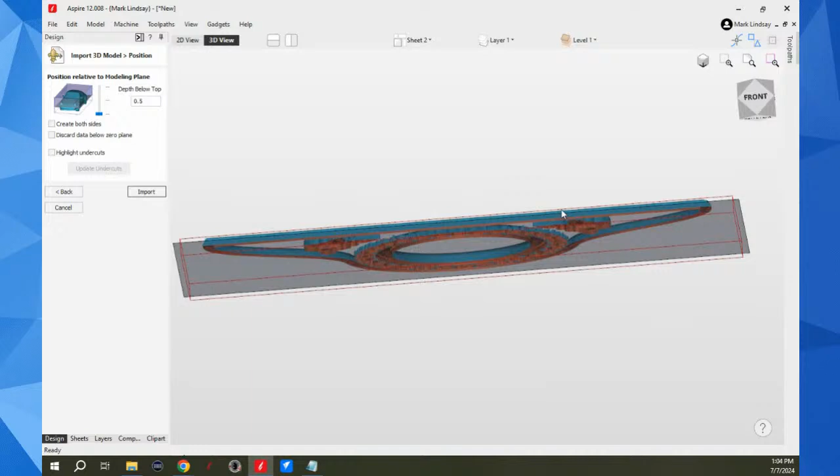Discard data below the 0 plane. If there is something down here, like for instance, if there was a stem from one of these roses that stuck down and you didn't want it, you would discard the data below this 0 plane. You don't want it imported.

You can highlight any undercuts. There are no undercuts in this model, so we're good there. So that's not really necessary. Now we can import it, finish the import, and that is now brought into our software.

We can go to the top. And now is when we can adjust that model height. For instance, once imported, you can also adjust the model height in the component properties. Absolutely. So let me go back to the top.

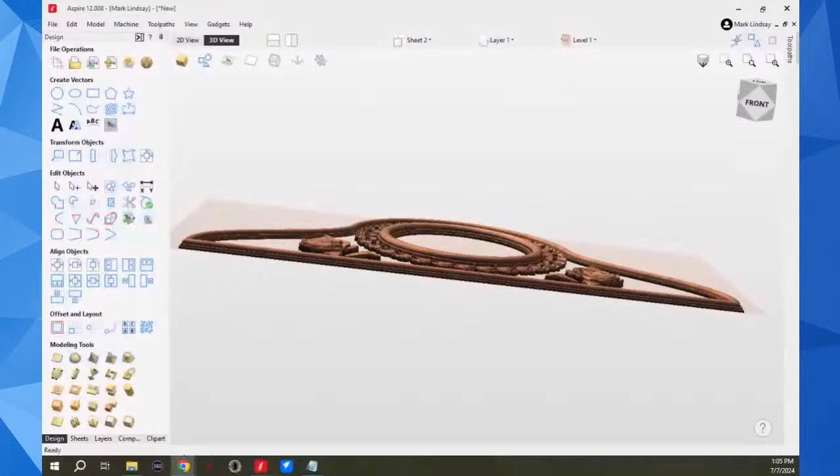There we go. And we'll go over to the component tree. I'll select that model. We'll go into properties. And we have a model height of just less than a half inch. If I want that to be thicker, let's say 0.625 - whoops, not two decimal points, Mark. 625. That's the most common mistake I make, is entering two.

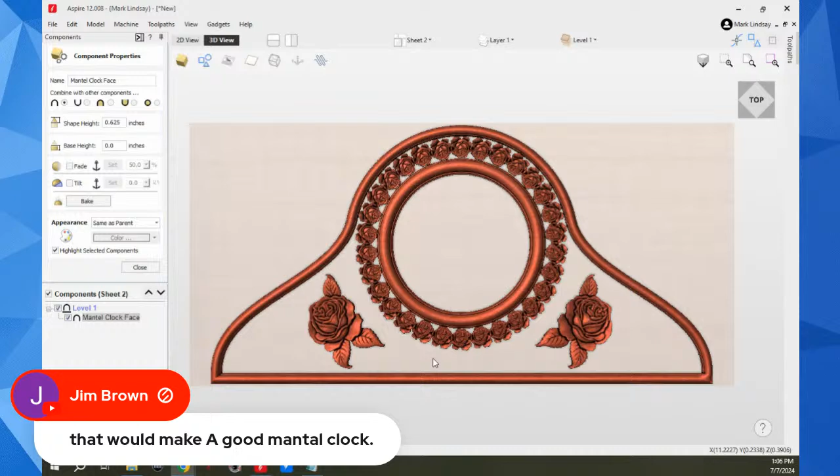Jim Brown says that would make a good mantel clock. I hear the gears turning, Jim. You're thinking make that out of sapele on like a cherry base, or vice versa, a cherry face on a sapele base. I hear the gears turning. Do it. Do it.

So now I have made this a lot thicker. It's going to stand a lot prouder. But that's still not the final thickness that I have to go with.

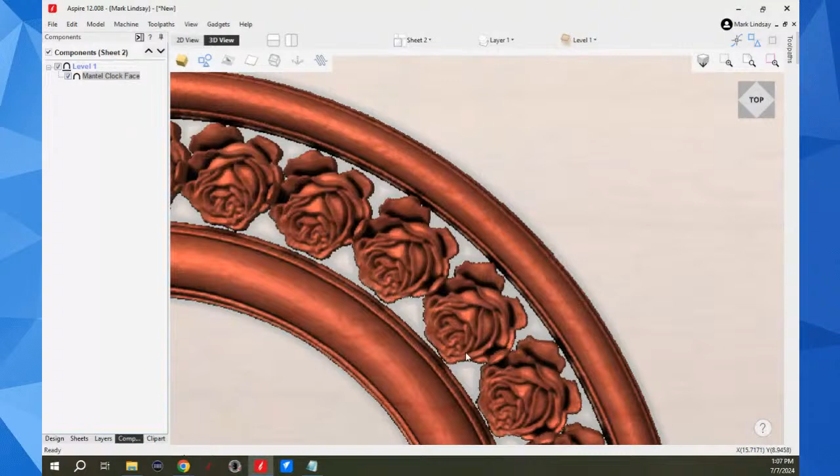Now, in this case, I would not use a zero plane because there's no reason to. Yes, it looks kind of raggedy here, but that can be cleaned up with a profile or a pocket if I wanted to recess this face. Same without here. It may look a little raggedy, but we're going to try it without a zero plane, and we'll see what happens.

Now, a minute ago, I said that the properties was not the final place where you're going to select the model thickness, or where you can select the model thickness. That's over here in material setup.

Before you do any 3D carves, if it doesn't open automatically, when you click 3D finishing or 3D roughing toolpaths, by all means go into material setup. Now let's see if this is automatically going to do it. Yes, it sent me into material setup.

My material thickness is 3/4 of an inch. Okay, that's fine. My XY datum is set to the bottom left corner. That's where I'm going to set my XYZ0 outside. My Z0 is the material surface.

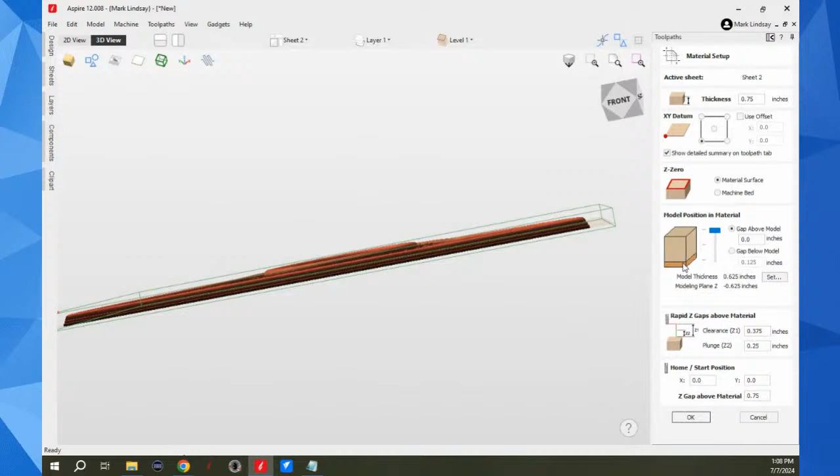And now here is model position in the material. As it sits right now, I've got this gap under the bottom of the material represented right here. The bottom of my model is right here on my modeling plane. In the material, that's going to leave me with a 1/8 of an inch thickness.

And that may be exactly what I want. Then again, it might not be. I can move this model within this block of material. This lighter brown area here is showing me where the model is. The dark brown area is an area that's not going to be cut. It's not a part of the model. It's been my experience that if I leave this way up here at the top...

I run the risk of leaving flat spots up here on top, because let's say the top of this ring, the Z is 0. The software is not going to calculate a cut where it's 0. But where that Z height is 0 could be a 1/16 of an inch wide. It's going to leave a 1/16 of an inch wide flat spot.

So what I like to do is put a gap above the model of 0.01, or 10 thousandths of an inch.

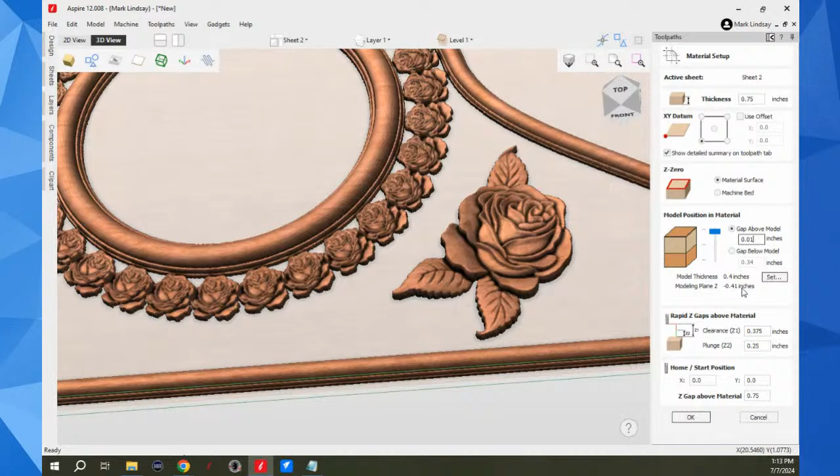My model thickness is 0.4. My modeling plane height is 0.41. Wait a minute, I set that to be 0.5. Let's try that again, Rabbit. Yeah, I set it to be 0.5. Apply.

And close. Wow, what's going on here? What a revolting development this is. I wonder, is it too many things going on this poor computer?

0.5. Apply. There it went. Okay. Wow. Close.

Wait just a rock picking minute. Come on, what's going on here? I said I wanted. Ain't it fun to watch me argue with my software?

Apply. Close. Okay, now my model thickness is 0.5. Did I hit the wrong button? Oh, well. All right. And now let's change this to 0.01.

And there we go. So what I'm getting at is, all the way over here on the components using the properties is not the only place you can set your model thickness. Because remember, this is going to model, then we'll click OK. That's good. And now that'll put us into the 3D finishing toolpath that I wanted.

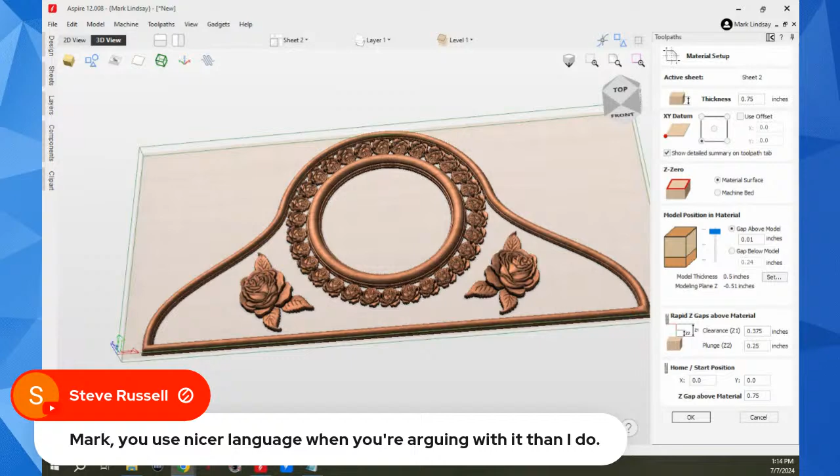So we'll click OK. And now we're in the 3D finishing toolpath. And I can do all of my calculate my toolpath and all that other good stuff. I'm not going to do that now because this is not what this is about.

But adjusting that model thickness over in - let's go back to sheet 1 - adjusting that model thickness, close, over here in the material setup. Here's a good example: I have 3/4 inch thick material.

I got this big error in red, and this is why you want to check this. My model thickness is thicker than my material. My OK button is grayed out. It's not going to let me calculate. It's not going to do it.

So when you compile, when you get a bunch of components stacked on top of each other, this is easy to do. And to your question earlier, Ellen, when it comes to you keep getting the error about model thickness being thicker than the material - I've got 0.802. This is where I can come and set this new thickness.

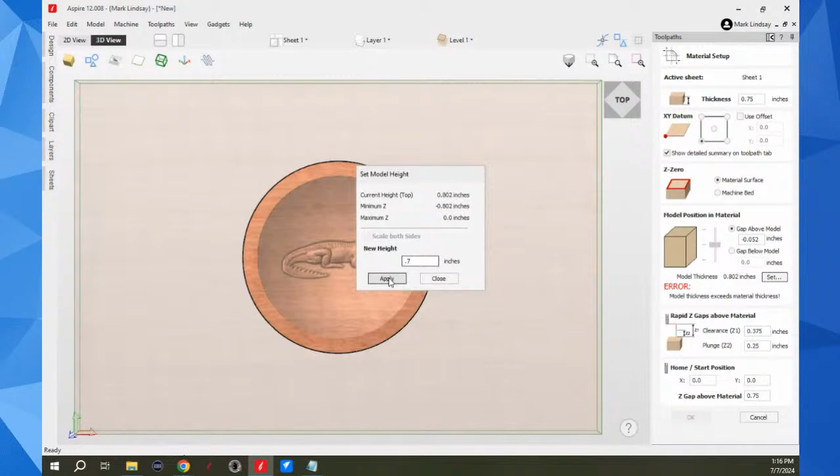Let's go for 0.7. 0.7. Apply. And then we'll close it.

That error is gone. And now I have 0.05 gap under. I want to drag that down. Let's do a 0.01 gap above. Click OK. And now I've got this 0.1, 0.01 material here.

It's going to carve through that to get to this model. Okay. Now, because this is a flat surface, I don't necessarily need that. I can set that at 0.0 because it doesn't matter if this is flat. Click OK, and that sets it at 0.0. And now it's fine. That'll carve just terrific.

Okay, so right here is where you adjust the total model thickness to get it within your material. Okay. Now, excuse me, sorry about that. Let's see.

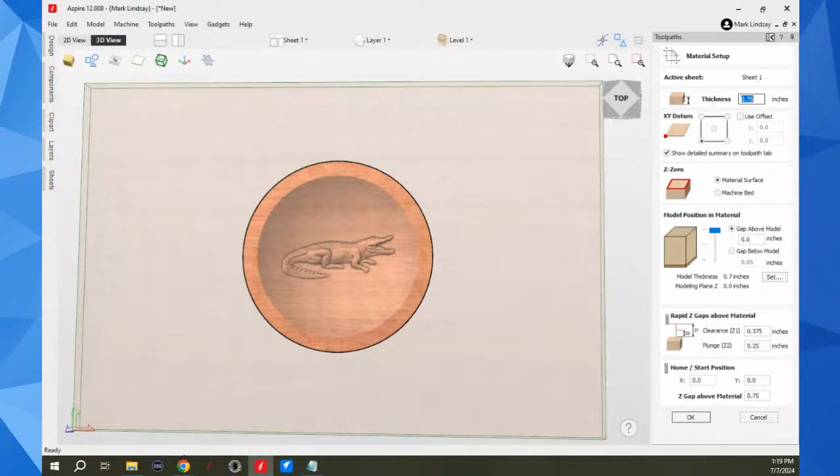The question specifically was, I made a dome to put a 3D model on for cribbage boards, not sure I need a zero plane on the bottom or on the top. If it's being cut in a separate piece of material from the rest of the cribbage board, you don't need a zero plane at all. It's not needed at all. So there is that.

Now, we can get further and further into this. We're an hour and 24 minutes into it, and I do need to wrap up. We can get further into this if you want to explore it further.

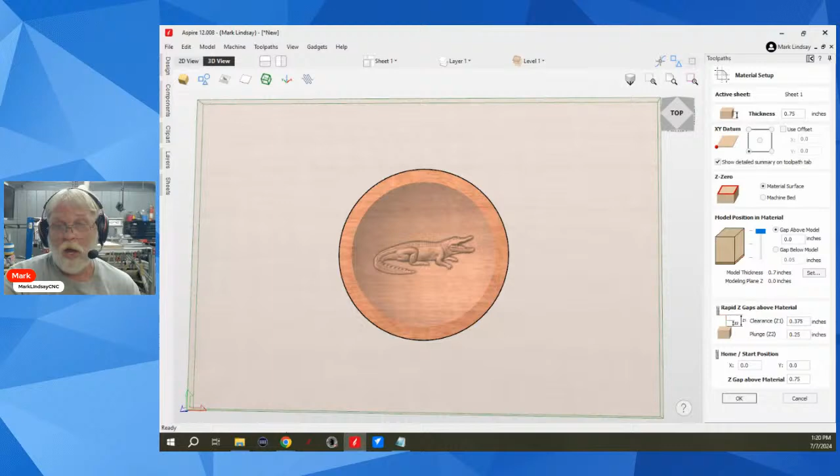Something I do want to explore further is - let me find Jim Brown's suggestion - on using the various layers of the various limit planes for different layers of material. I do want to explore that more, but I don't have time to explore that now live. But if there's interest in exploring that, we can sure do it. Just let me know right here, right now, if that is something you'd be interested in doing.

The main point I wanted to get across is there are two contexts in which you have a zero plane: one being import, the other being the design side. They don't have anything to do with one another. They're just called the same thing. That, I think, is a mistake.

In the import window, it is also called the modeling plane. I think that's a more appropriate name for it. But then again, it's not really the same as the modeling plane on the design side, so there might be some more confusion there.

Okay, I'm getting some positive feedback. All right, well we can do that next week. I'll spend a little bit of time working on this, seeing about using various limit planes in various thicknesses of material.

In answer to Mike Mazalik's question, will you explain how a modeling plane is used with a rotary project? Maybe in the next one. I seriously doubted I was going to get into it in this, simply because I try to limit to about an hour and a half. If we have time next time, I will.